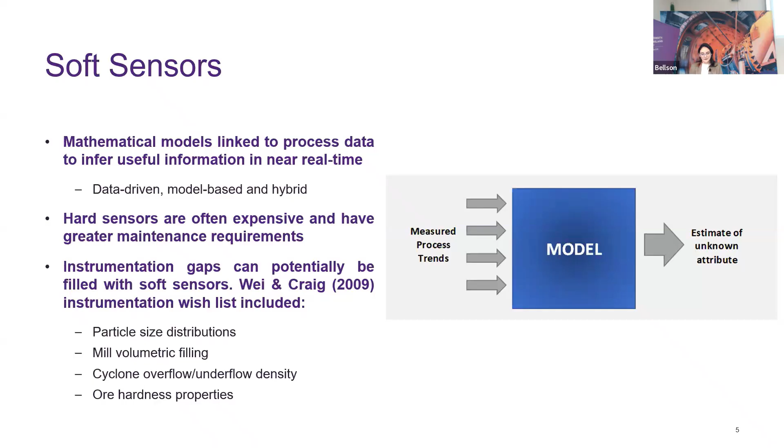So let's start with data-driven soft sensors. These are built using historical data and real-time data, often employing machine learning or statistical models to estimate the process variables. Their main advantages include the ease of implementation, when sufficient data is available, the ability to model complex and nonlinear systems, adaptability to changing process conditions, and they are also scalable and ideal for systems where physical modeling is difficult or impractical.

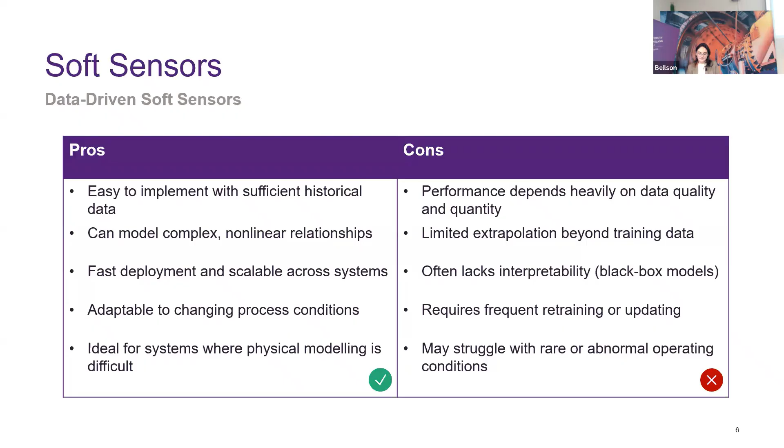However, they come with limitations. For example, their performance is highly dependent on the quality and the quantity of the data. And they often struggle to extrapolate beyond the training data. Additionally, they can be opaque or black box in nature, making them less interpretable, and they may require frequent retraining to remain accurate, especially in dynamic environments.

On the other hand, model-based soft sensors rely on first principle or mechanistic models grounded in physics, chemistry, or engineering. These sensors are highly interpretable and robust to changes in operating conditions, making them very suitable for safety critical or regulated environments. They can extrapolate well outside known data ranges and are less dependent on large data sets.

However, developing these models requires deep domain expertise and can be computationally intensive. They may also struggle with highly complex or poorly understood systems and often need recalibration. Scalability across different setups can also be challenging due to the specificity of these models.

And to address the limitations of both of these approaches, many modern systems are now applying hybrid soft sensors, which combine the physical insight from model-based approaches with the flexibility and adaptability of the data-driven techniques. This integration allows for more robust, accurate, and scalable solutions in complex industrial environments.

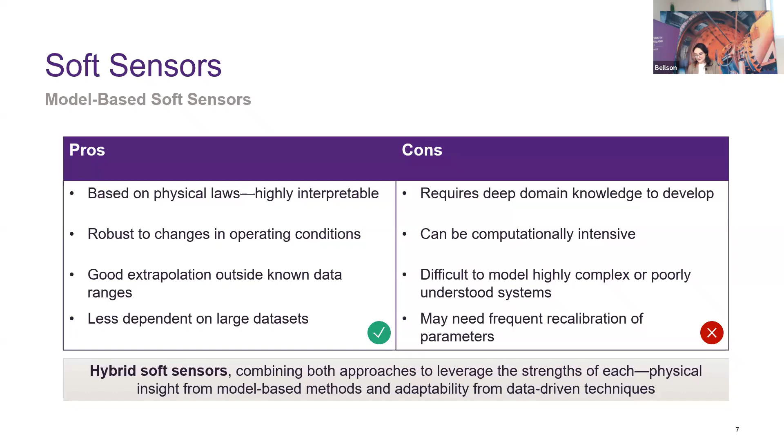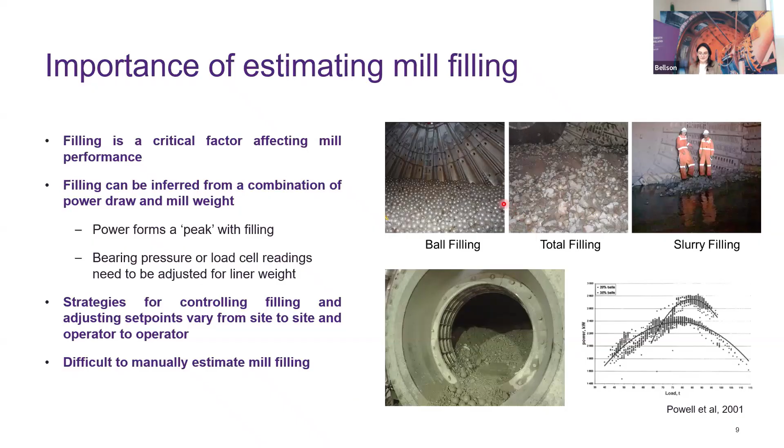The JK MillFIT combines information from the available instrumentation in the mill with a series of mathematical models to estimate the total filling and the ball filling and provide an indication whether slurry pooling is occurring or not.

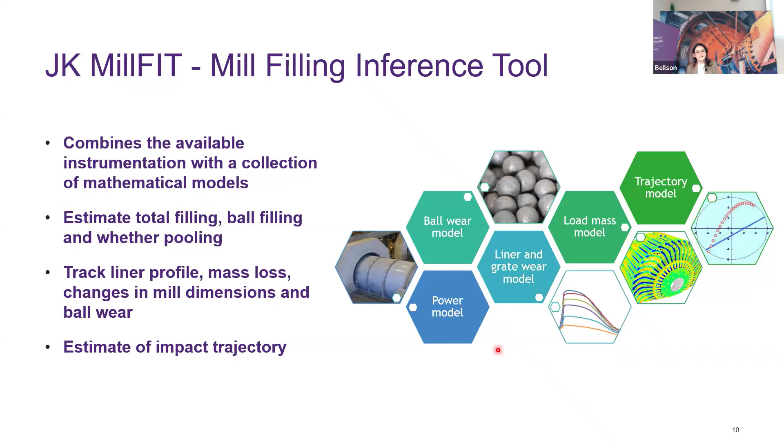The models that we use in these soft sensors are a power model, a ball wear model, a series of liner wear models, a load mass model, and a trajectory model. This way, MillFIT can track the changes in liner profile, mass loss, and change in the mill's dimension, and it can also provide an estimate of the impact trajectory. So I'm gonna give you a bit more details about these models.

So firstly, we develop a series of liner wear models. These are built from data from mill scan reports, which provide measurements such as the lifter height, the plate thickness, and the face angle. And then we run a stepwise regression of this data to obtain models of these dimensions based on the cumulative tonnes processed by the mill.

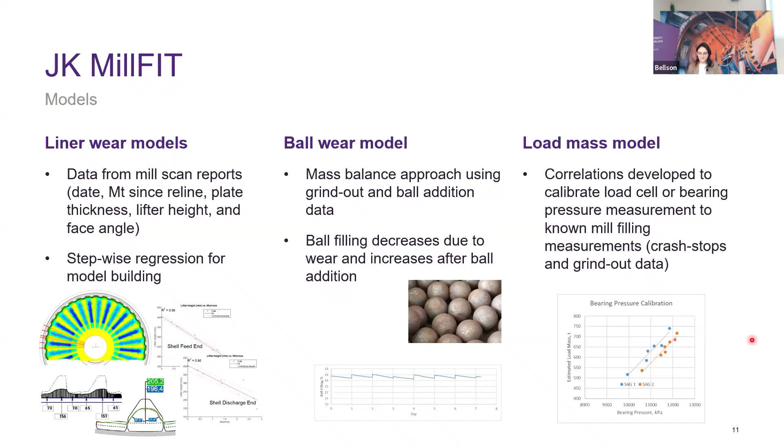In addition, MillFIT uses a modified version of Morrell's power model, and this includes the effect of uneven slurry filling and also a power reduction by slurry pooling. Another modification that is included is to estimate the efficiency depending on the type of motor of the mill.

And finally, we have the trajectory model that corresponds to a simplified version of Powell's trajectory model. And this can predict the impact point independently of any noisy measurement using just the shape of the liners from the liner wear models and the mill speed.

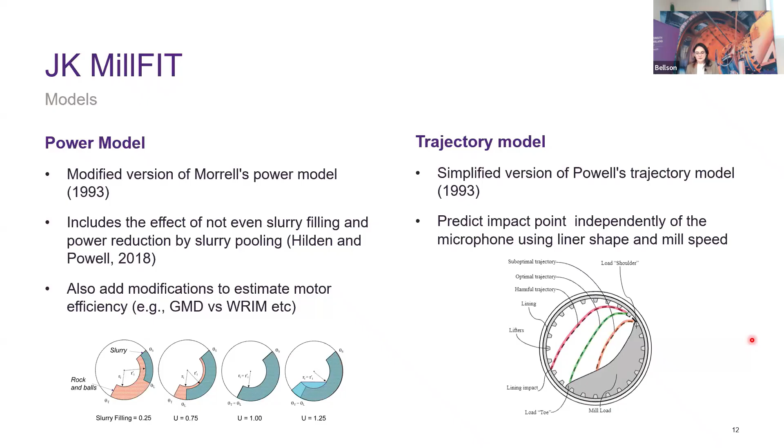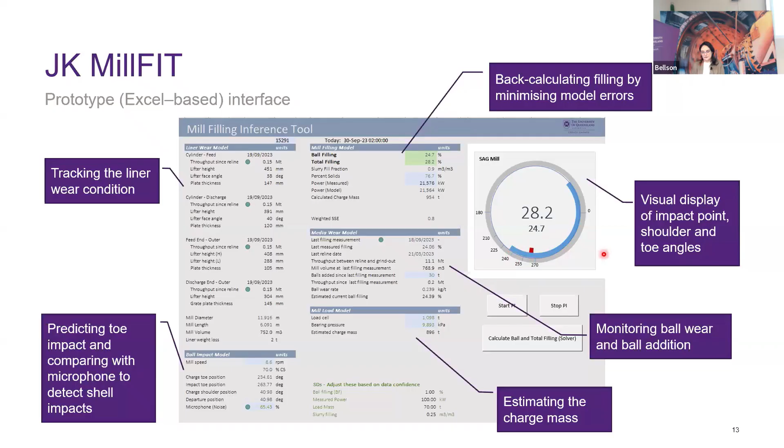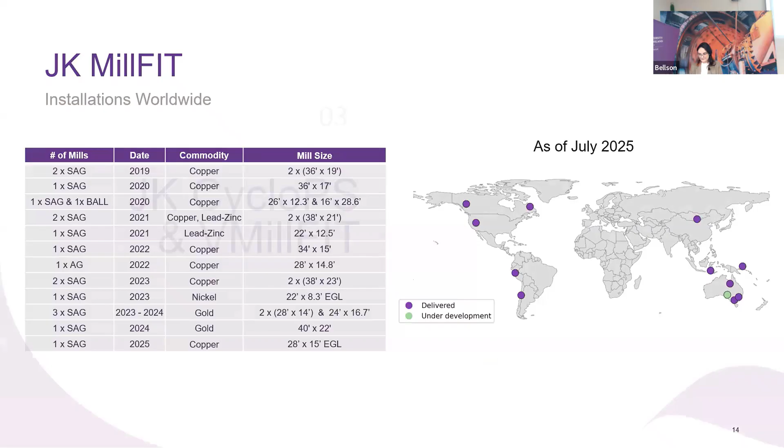Okay, so the next development is CycloPS, which stands for Cyclone Performance Sensors, and VMillFIT, that is a vertical mill filling inference tool. The issues that we want to address with these tools are the presence of unreliable instrumentation in grinding and classification circuits. This might be the density or the particle size distribution sensors.

Also, the lack of online measurement of critical variables, such as, for example, the feed size to the cyclones, suboptimal classification efficiency, difficulty in estimating the circulating load, the risk of overloading the mill, and the lack of insight into internal mill conditions.

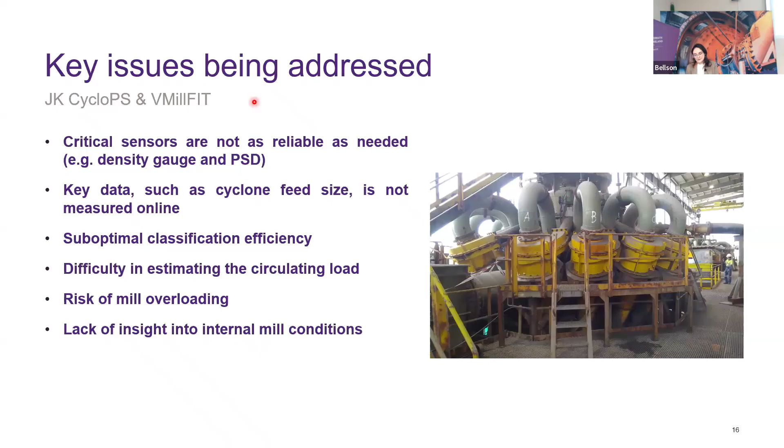So the cyclone performance sensor models each cyclone individually using either Plitt or Nageswararao model. And although all cyclones have the same feed particle size and operating pressure, they can have different dimensions. This is different vortex finders or spigots. And these components also can wear over time. Therefore, we use maintenance data and replacement dates to model their wear.

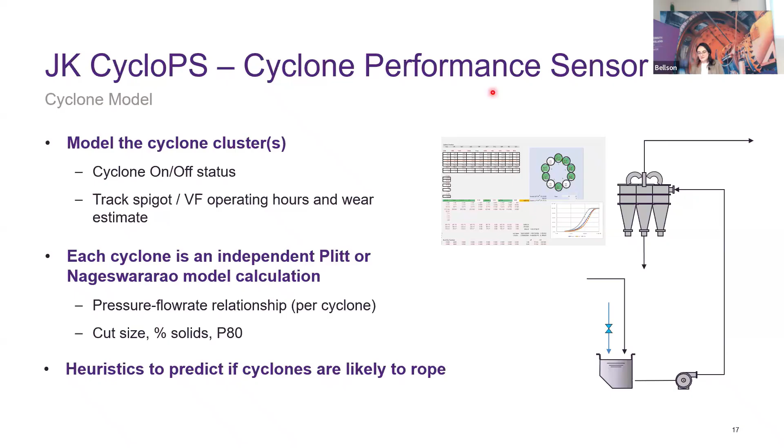Additionally, heuristic models are implemented as an indicator of probability of roping in cyclones. And these are based on some heuristics that consider the solid concentration in the overflow and underflow, the apex capacity, or the apex to vortex ratio.

CycloPS works in combination with a pump model. This is because the same flow that is transported by the pump needs to be the same that is fed into the cyclones. So the pump model is built from the digitization of the pump curve to obtain some relationships such as the flow rate and head and the flow rate and power for a range of pump speeds. And then when we get all these data points, we fit polynomial regressions to get this relationship.

We also applied a head ratio or efficiency ratio to correct the pump performance for transporting slurry instead of clear water. And in addition, we run complete pump design calculations to be able to estimate the total dynamic head in the system.

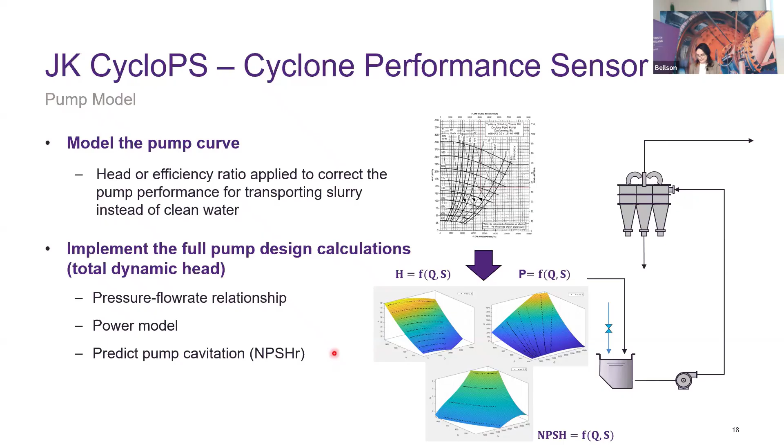And the last sensor corresponds to VMillFIT, or vertical mill filling inference tool, which uses the following parameters and models. So first we have media wear that is estimated from power draw data, and also considers the wear of the screw. Then we have a correlation between the charge mass and the mill power that also takes into consideration the wear of the screw.

An internal classification model, which uses a theoretical approach of hindered settling theory to estimate the classification cut size.

And finally, we used population balance developed by Hasan, and this considers a breakage function that is derived from the characterization of the ore, the feed particle size distribution, which comes from the underflow of the CycloPS model, the specific energy that we obtain from the mill power, and the feed rate, hold-up weight that is corrected by the volume that is being used by the media, and also the screw wear.

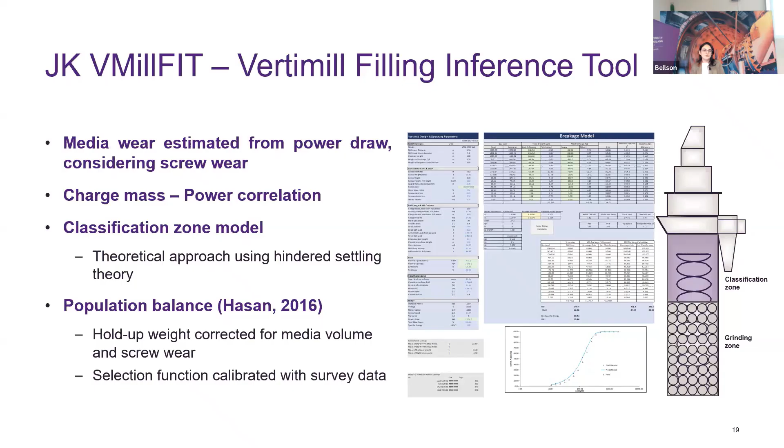A selection function calibrated from circuit data, and classification efficiency parameters derived from the internal classification model. So in combination, JK CycloPS and VMillFIT provide real-time estimates of particle size, percent solids, and volumetric flows in all the streams within the circuit.

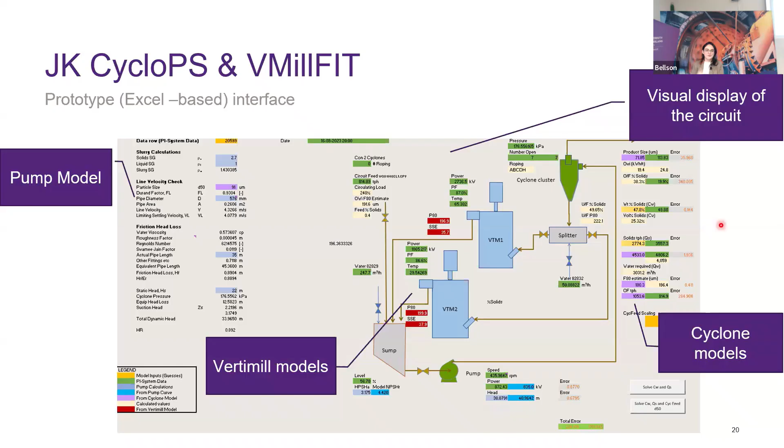Here is also the interface of this, similar to JK MillFIT. We first implemented the prototype Excel-based. So this is the interface of the Excel-based tool, where here we have all the dynamic head estimation calculations and the pump model. We have here the VMill equations and models; however, we have a bigger spreadsheet in the background. And also we have here all the cyclone models, for which we also have a more detailed spreadsheet running in the background.

So how do all these sub-sensors manage to determine the unknown variables? How do they work? These sub-sensors use an optimization algorithm that minimizes an objective function, which corresponds to the weighted sum of the squared errors between the measured or estimated variables and those predicted by the models that we just reviewed. So in this way, the algorithm will search for these unknown variables or parameters to obtain the smallest error, subject to some physical and process constraints.

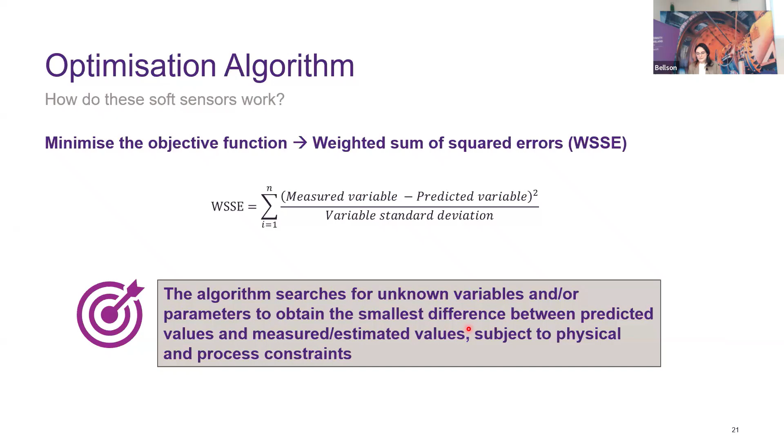Okay, so now that we know how soft sensors work, how can we implement them? Well, the development and implementation is a process. Here we are summarizing the most important phases of this process. So we start with the acquisition and pre-processing of the data. In this case, we have this data coming from the mining site. And then we clean this data, we transform it and integrate it.

Usually we have different sources of information that can be the lab, can be the historian system, or even, in the case of the liner wear reports, just PDF files. Then we develop the model. So in this stage, we fit all the JK models that I presented to you. And then we build the prototype in Excel. And also sometimes we develop a Python version of the tool.

This is because we need to validate the tool and run it over a long period of time with a lot of data. Usually Excel and VBA sometimes collapse, and then it's much easier to work with Python code for that. The following stage is training and testing. In this case, the models that are not machine learning don't really need to be trained. However, all the models need to be calibrated. And also we implement some additional correction models if we see a different behavior from what it's supposed to be.

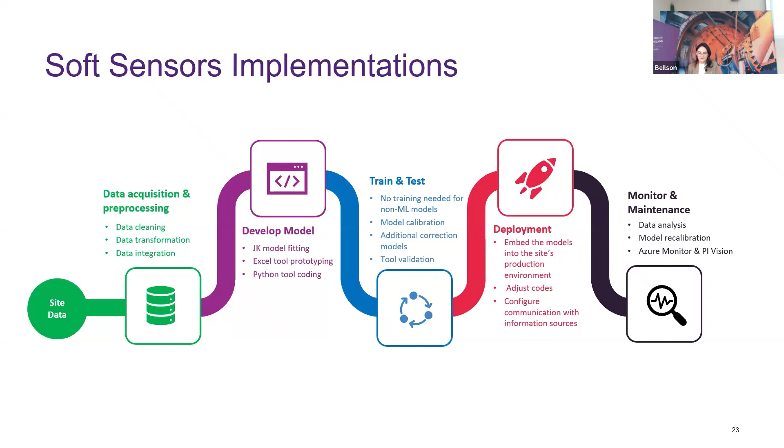And finally, we can also do that in some platforms that have features to monitor the tool, such as Azure Monitor or PI Vision dashboards. So we have different alternatives to implement soft sensors. As I mentioned, this will depend on the technological platforms of the site and how quickly the outputs need to be accessed, or whether they will be used as input for control loops.

So some alternatives that we have done include, for example, integrating the tool into the PI system, where we deliver an Excel-based tool that receives input from a PI server, and the site can decide if they want to configure the outputs to be written back to the PI server or not. Another option is to integrate MillFIT into the DCS. And for this, we have several different ways to do this.

One is using code-based solutions. So in this case, we can deliver Python code or custom Python code. That was the case when we implemented through Azure ML. And also, since the site can access the source code that is in the prototype in VBA, they can also translate or rewrite this code to whatever other language is suitable for them.

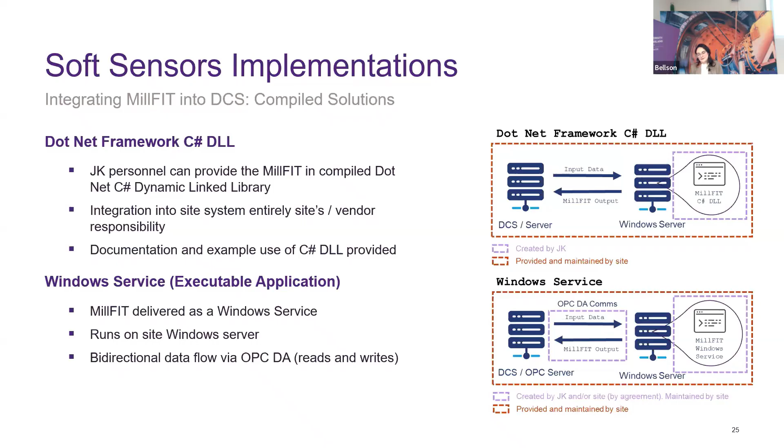Another option to integrate into the DCS is by compiled solutions. So in this case, we can integrate the soft sensor into the DCS, for example, by providing compiled .NET code in a C# version. And this is a library that can be integrated into the company's control system or a third-party APC platform, for example. And the second option is a compiled executable Windows service application. This will run on a Windows server and can communicate with the DCS bidirectionally through OPC.

In this diagram, I summarize some of the process to implement a soft sensor through an Azure ML platform. So as I mentioned before, the process begins with the data acquisition and pre-processing, followed by the development and validation of the model. And all this is carried out by the JKMRC team with constant feedback from the experts of the site. And all this can be done remotely or locally on our own computers.

Next is to deploy the tool into the Azure ML environment, but this is just a QA and QC environment. This is done with the support of the IT team of the company. And then we can also adjust the code. And finally, when this model in QA/QC is validated, then we move to the production environment.

So in the production environment, usually the mining site configures all the communications so we can get all the inputs from the data historian, that usually is the PI system, and then run our estimations and provide the outputs back to the DCS or also record them in the PI system. Then we can send them to the DCS to provide inputs for control loops.

And here is just an example of a dashboard implemented on PI Vision. So it pretty much just runs in real time, getting all the inputs from the PI system, and then you can do different plots to track the accuracy of the models and all the outputs that are being provided in real time.

And we can see an absolute average difference of around 0.68% when we compare the prediction of the tool with grind out measurements that can be performed using several techniques. That can be, for example, lifter counting, measuring the height from the charge surface to the ceiling, or by 3D laser scanning.

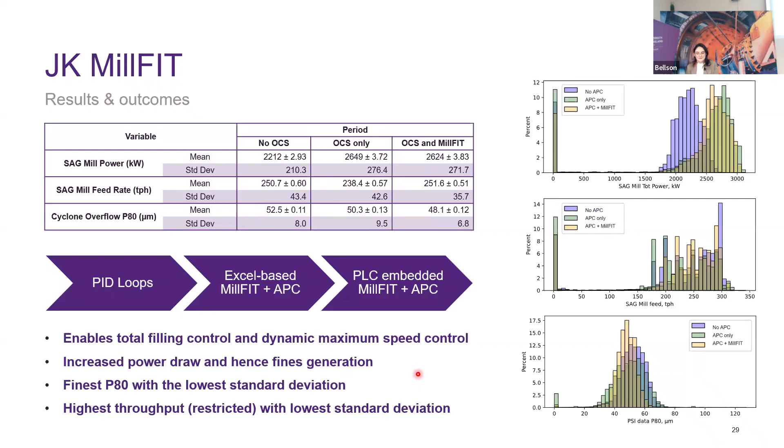So pretty much in this mining site, what was going on is that we implemented the soft sensor, and we get around this error when comparing with the ultrasonic analyzer. And then this device was not available anymore. It failed, and they continued operating with only the signal of our soft sensor. If we compare the whole period from when CycloPS was implemented, in 2023, till now, we get an even lower error compared with the lab, around 15 microns.

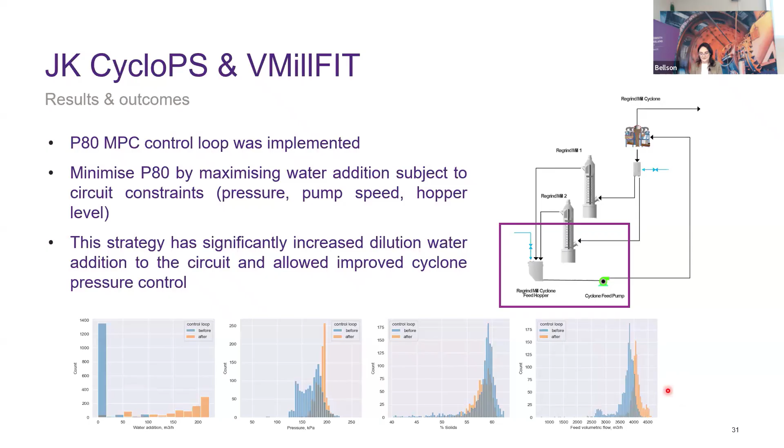So it is expected that this condition will benefit classification. However, this could not be corroborated due to the presence of coarser feed to the plant just after implementing the control loop. So pretty much all the conditions are better for the cyclones. However, the feed to the SAG mill is coarser, so we also get a coarser P80. So we have not been able to minimize it, but it's the minimum for this new condition.

And finally, what we have also received as feedback from the site is that if needed, they could use this P80 signal from CycloPS to constrain the feed rate to the circuit, since this soft sensor provides a less noisy signal than the ultrasonic analyzer, and obviously a higher frequency when compared with the laboratory results.

So to finalize the presentation, I will read you some of our conclusions and future work. Some conclusions are that JK MillFIT, CycloPS, and VMillFIT were successfully integrated into different environments, delivering real-time estimates of the circuit performance. JK MillFIT presented 0.68 mean absolute difference in ball filling when compared with grind-out measurements, considering different techniques. As I mentioned, these can be lifter counting, measured height from the charge surface to the ceiling, or 3D scanning.

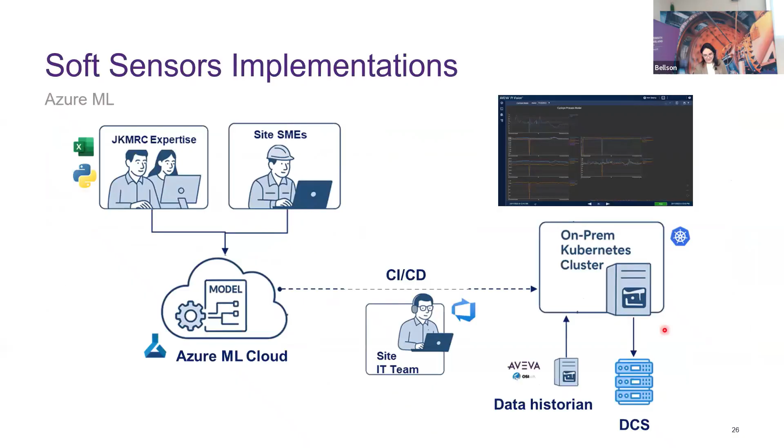So if you remember, in the table where I present all the different implementations, it started in 2019. I arrived here in 2023. So I cannot speak for other people's jobs, but what I've seen is that, for example, I won't name the mining site, but they have a lot of failures in their grates. So the grates are the ones that hold the charge inside at the end of the mill.

So when this fails, more material will come out of the mill. So they lose a lot of grinding media. So in those cases, we notice a bigger difference between the prediction of the tool and the real measurement. Also it can be very related to the technique for measuring the filling, because lifter counting is very inaccurate. So if you notice, half a lifter can be translated into 2 or 3% difference. So if I see one more or one less exposed lifter, it will

change greatly the outcome. But can you foresee an instance where you might see an outlier that indicates that you're just missing some fundamental piece of input data that your sensors need to be taking into account? That you don't have the data there for.